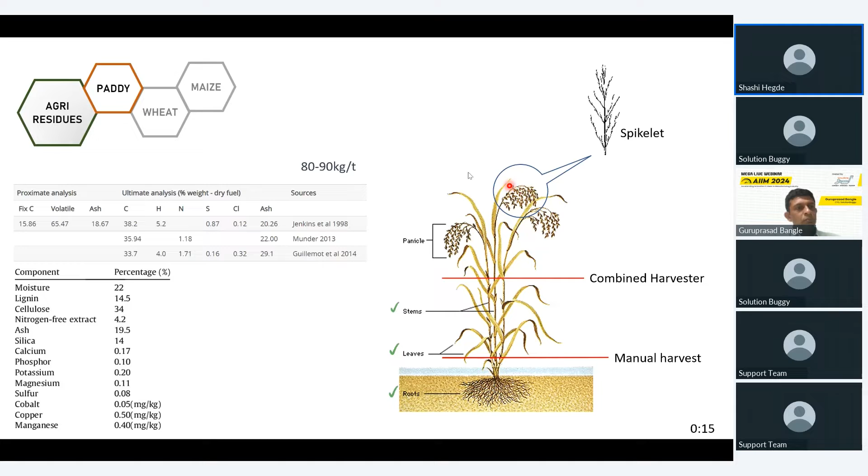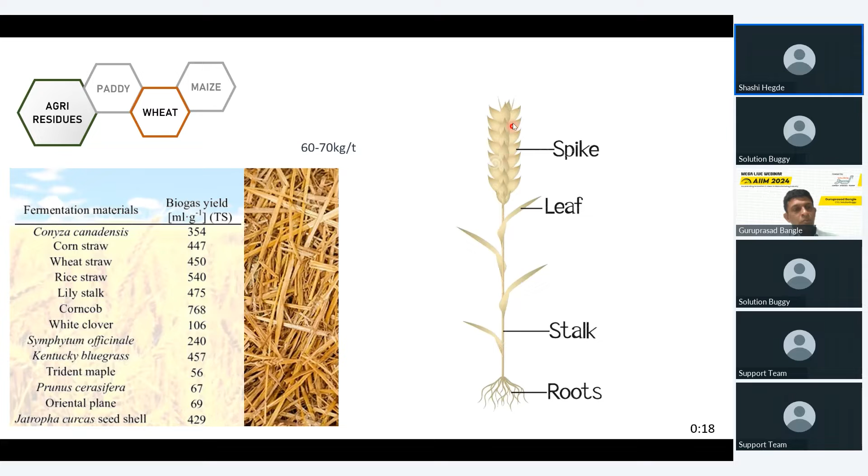Then coming to the wheat straw, that is also of the same story. Whatever spike is there, that is not digestible that easily. Better to make a pellet out of it.

Then coming to maize, there are two options. One is the maize silage, and there is the cobs. Option 3 is harvesting it halfway through, when just milk gets formed in the corn kernels, and digesting it at that time. Then you will not get the corn at all. You will be using this as an entire energy crop, just like Europeans.

The same thing we slightly modified, and we started using Napier grass instead of corn. The advantage is with Napier grass you need not keep sowing every year or every season. Once you sow it, 8 to 9 years you can keep on harvesting. Whereas with maize, if you use it as an energy crop, every time we will have to redo the things.

Then coming to Pressmud, Pressmud is more meaningful for people who have a sugar factory. For rest of the people, sugar factories are generally controlled by politicians, so you should know how to handle them. They may or may not respect the agreements. They may not go for long-term agreements. So just believing in a single sugar factory, if you go for a Pressmud-based CBG, it may become risky. That is the practical aspect of it, not the scientific aspect.

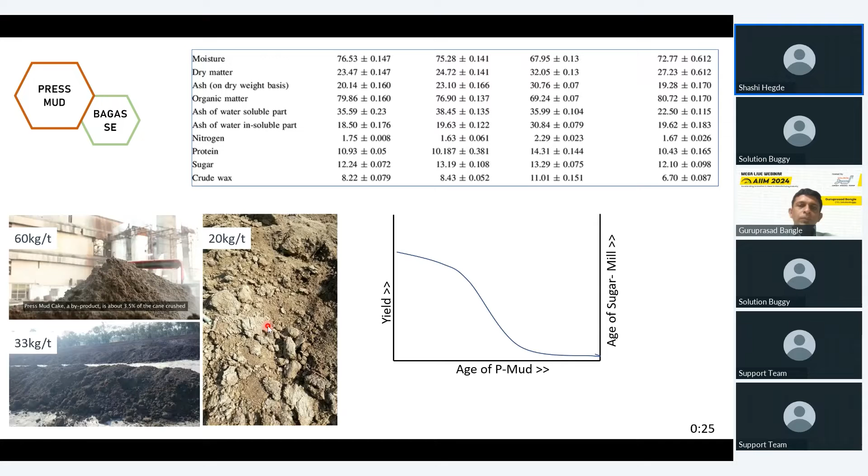Then there is rule number 3. Rule number 3 is: younger the plant, easier to digest. So if we take paddy straw, if paddy's life cycle is, let us say, 4 months, and you cut it at 2 months, you can digest the entire paddy plant.

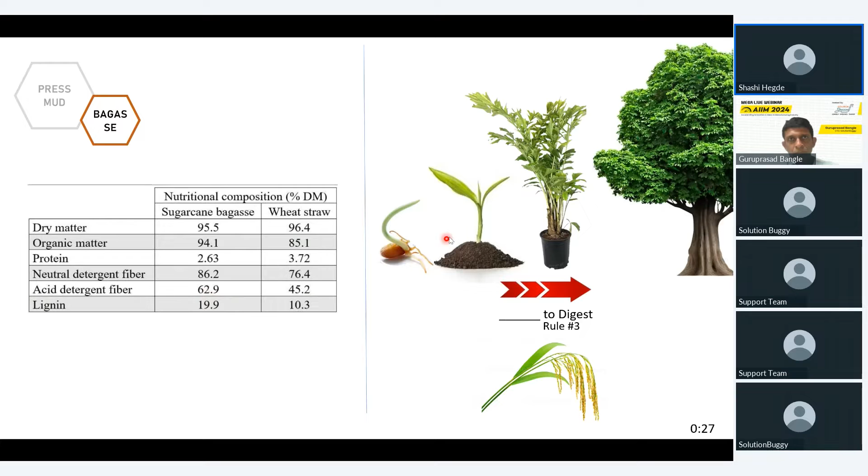Whereas paddy is giving the rice also. When it gives the rice output, the plant has finished its growth cycle. When the plant finishes its growth cycle, the lignin component, which is non-digestible or difficult to digest, is highest. So the older the plant, the more difficult to digest. That is the thing we have to keep in mind.

And the good thing about all animal manure, especially cow dung and things like that, is that the bacteria as well as the food are side by side. It is already there in the cow dung. So this will never get into any failure, because bacteria and food, everything is there. So it straight away goes for digestion. So for 25 to 30 years, there are millions of plants established based on the Deenbandhu scheme which are still running, because it is easiest to digest.

But we have a very low yield. It will be 15 kg per ton to 22 kg per ton. So we have to see that, in the Indian context, it is not highly profitable from cow dung.

The reason is that large dairy farms in Europe and US have a mechanized way to collect the cow dung and all the waste they generate. Typically, there will be a moving belt which keeps scraping the surface. Whatever cow dung is there comes out and goes into a channel or equipment. It gets collected and flows into the digester. There is no manual intervention required.

Whereas Indian cow herding or keeping of cows happens typically either in a dairy where it is managed manually, or in a Goshala where it is a totally open space. So each lump of cow dung may be falling 10 meters apart, and it is very difficult to collect those kinds of things. So we have to keep those in mind.

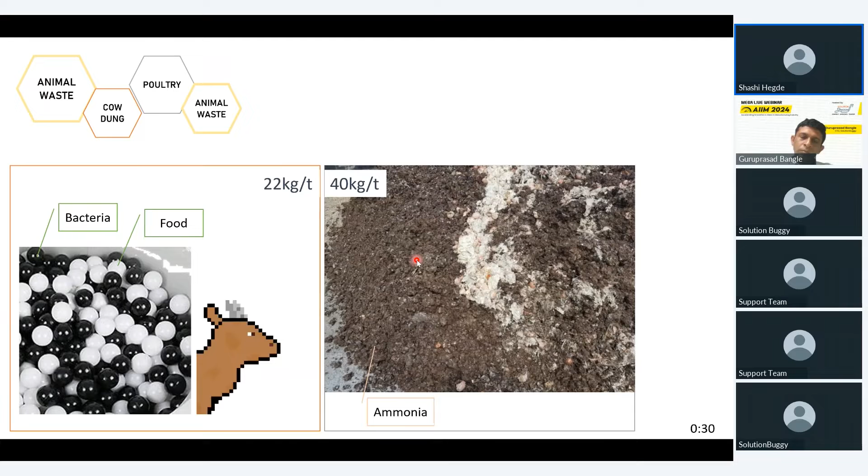Two things will come. One is sand, which has to be filtered out, and this has a lot of ammonia. So you have to keep mixing in external air, and whatever nitrogen content is there will fly away. Otherwise it will become overfeeding of nitrogen. Only then can it be fed inside.

But your project will be giving out a horrible smell. So that is how the poultry litter works. You cannot put it very near urban dwellings or areas where people are living, they may complain. Poultry litter will horribly smell because of the ammonia.

All this gas generation, whatever people say, is not at all new. Every ETP, STP plant is producing methane. In most cases they are collecting it; in some places it is left to air.

But here the concentration on our problem statement is to clean up the water, so people are not caring about emission of the CH4. There are many ETP, STP plants - effluent treatment and sewage treatment plants - which have a digester called UASB. So they are producing biogas, and in some places they are just burning it off.

Here the advantage is raw material is typically free in an MSW plant, and if possible, negotiate with the local municipality to give a tipping fee on top of the raw material, some 100-200 rupees per ton. If they give that, the whole economics will work very well.

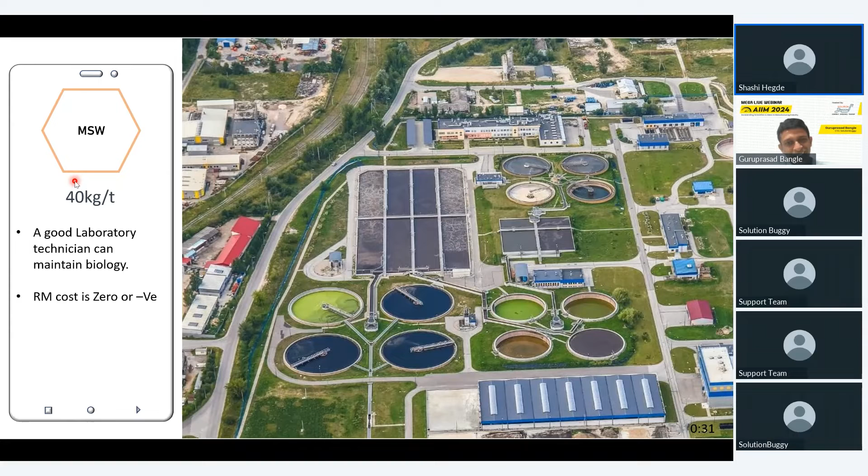Considering all those things, around 60% will be biodigestible. Another 40% we will have to send back to landfill. So that's why tipping fee is very important in MSW projects.

Then coming to our own favorite, which is the Napier grass. Here we need not depend on anybody - depend in the sense, depend on the farmers. We can take land on lease or contract farming basis. It's extremely easy to grow, just like sugarcane, and it will keep growing for 8-9 years.

What we do is, there is ready sugar and protein in this, which we will anyway digest. Any bacteria can eat away this protein, oil and sugar. Nobody can stop this gas generation either, so this will automatically happen.

So 35 kg of CBG will come because of this. Then we are left with the fibrous part. The fibrous part is also digested using an enzyme, so we convert it to cellulose, hemicellulose, and then to sugar. Once it becomes sugar, the bacteria will take care of making the gas. That way we are generating 65 kg of methane from 1 ton of Napier grass.

And all our projects are basically viable without considering any revenue from the fertilizer. The fertilizer, you can either sell it or put it back into the Napier grass.

And this pre-treatment - there is one more major difference we have to highlight. With pressmud, cow dung, poultry, the size reduction has already happened, it's already in a very small size. You just have to add water so that it becomes slurry.

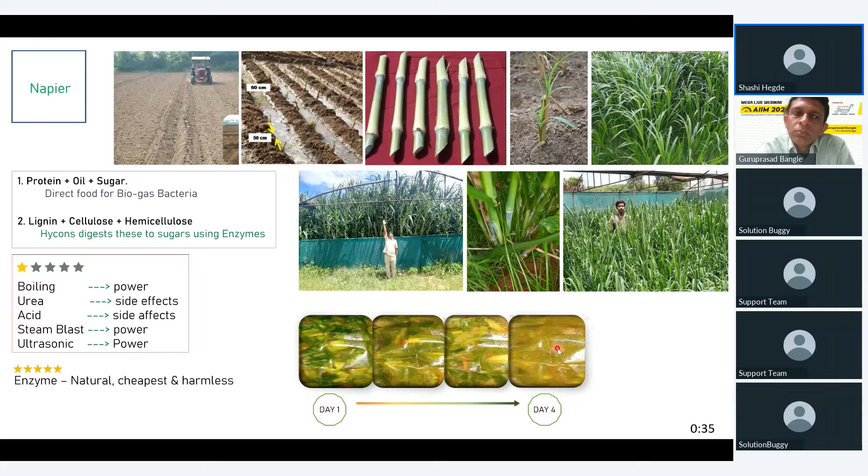When we do the enzyme-based process, you can see that on the first day it is all chopped grass. By the fourth day, it becomes a liquid or sugary slurry. You are pumping, mixing within the digester, moving the slurry here to there, everything will become very easy, just like water. So this was our experimental plant, and here I would say how we got so much data.

There are only two companies that did R&D in India when Satat came in. One is Hycons, ourselves. The other is Praj. Praj Industries were connected with the sugar industry, so they did a lot of research on Pressmud. Whereas Hycons, being from Bangalore, we did not have access to any other raw material, and we did not want to go to municipal solid waste.

So we came out with, we started studying and finally arrived at Napier. But Napier had no technology available, so we had to develop the technology. You can see square, rectangle, round, all kinds of digesters we built on a rented place. Then for all this purification, we converted our truck, which ran for about 10,000 kilometers. Then we also built the purification unit just to understand how it works, so that we could ask the right questions.

to purification suppliers. Then even a central government minister visited during our R&D days, because the government wants to go for multiple cropping or crop diversification. So that's how we got approved by Satat, Indian Federation of Green Energy, Agarkar Research Institute, Indian Institute of Science, and last month we got approved by the Ministry of Renewable Energy, Kapurthala Institute also.

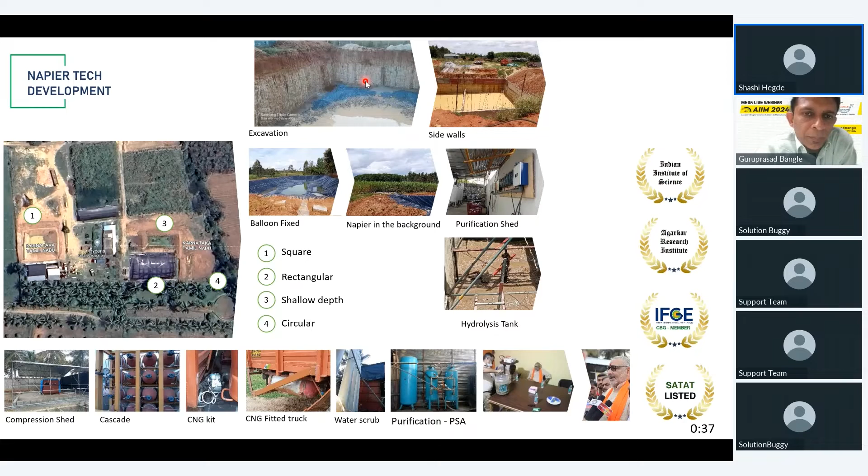Then coming to one important thing all of us have to learn, especially the technical guys. There is a gentleman called Buswell. He was American, working in something like the Pollution Control Board in the US. In the municipal solid waste side, he wanted to understand mathematically how much gas will come. So he came up with a formula to estimate methane yield from a feedstock.

If you do a Google search, you will get this formula. We will not get into the nitty-gritty of the formula, but just remember the Buswell formula. You can really estimate the entire gas potential from any feedstock.

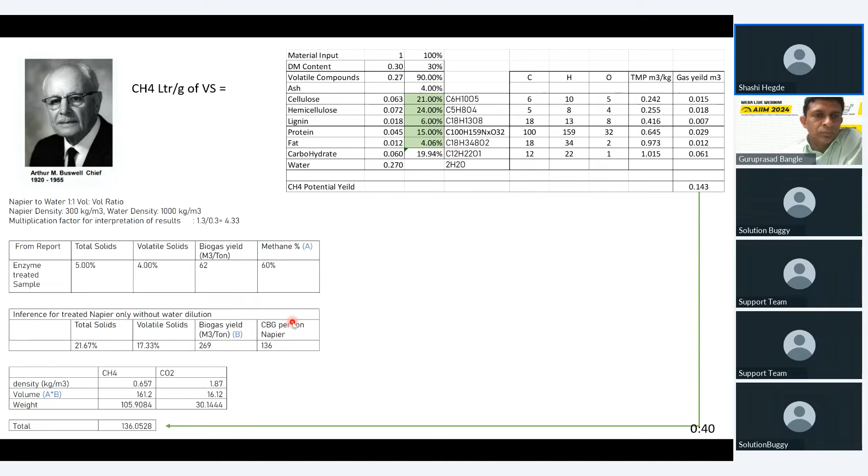Now if you look at this, this is the Napier calculation. It is supposed to give 136 kg of CBG from 1 ton of Napier grass. That is, 13.6% is supposed to come, whereas we are halfway through, because there will be efficiency losses due to the large size of the digester.

Then the next point we have to cover is whether we can mix multiple feedstocks. The true multiple feedstock is nothing but municipal solid waste. So you get to hear multi-feed digester, multi-feed digester. There is no way multi-feed digesters and all will just happen. Let me give you an example.

I am a South Indian. My diet is fixed for a rice-based diet. Probably once in a while I can eat roti. Similarly, my North Indian friend's stomach is adjusted to wheat. The same way, when we shift, if I go to North India and they come to South India, and we continuously start having that food, even within our digester, which is the stomach, there will not be a conducive environment for those bacteria.

So we will end up having acidity. If somebody is promising or thinking of putting anything and everything into the digester, it is possible, but not like a drastic difference, not the very next day. There will be a gradual increase you have to do, then a gradual decrease you have to do, so that the bacteria eating that particular substrate get developed and multiplied. So suddenly we cannot give a shock to this bacteria.

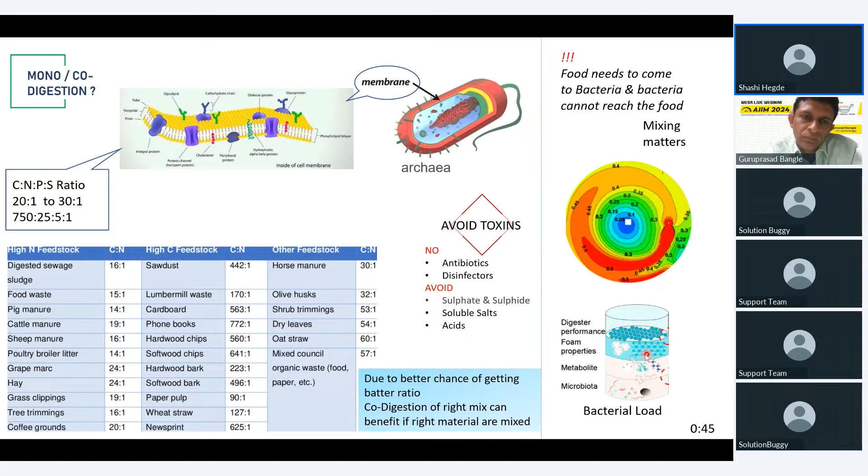Right, this is the basics about feedstock, and don't ignore the mixing. These bacteria cannot move around on their own. They cannot swim. They do not have legs, hands, and limbs. We have to see that the food reaches their mouth. So the only way is to mix the tank very well, and at various levels different types of bacteria are there. Mixing doesn't mean making a lassi. So we have to take care of it. So this is about the feedstock.

What we'll do, people will go to sleep. So we'll take a round of session questions.

So one question which came up is a continuation of what you were discussing. You said we can use multiple feedstock, but if you are going for Napier or anything, you should do the pre-processing before, right? So how many days more does it take? Let us say the number of days it takes for the bacteria to digest and release the gas. Will that increase when you go for Napier, because you will have some days for it to get pre-processed?

No. And see, on average, we have to maintain 30:1. There is no increase or decrease in that sense. Now let us say cow dung will get digested in 18 days. Napier and all, better to keep it for 40 days. But at the same time, from 1 ton of cow dung you are getting 15 kg of CBG. From Napier you are getting 65 kg of CBG.

Right. So if more sugar or carbohydrate is there, it takes more time for these bacteria to eat and make it 80-20 ratio. We call that HRT, hydraulic retention time. Thumb rule is all pre-digested, like cow dung, poultry and all, 20-22 days. Pressmud is like 25 days. Then any agri biomass, better to keep it for 40.

So now we'll talk more on economics; the feedstock part is done. We'll talk about producing the gas. Since I have spoken on most of this Napier part, I will skip this. And we also talked that this gas production is natural. We can either capture it or leave it. In nature, the ultimate reality of any biomass getting degraded is becoming a gas. Even the human body, when we bury it in soil, will finally become gas only.

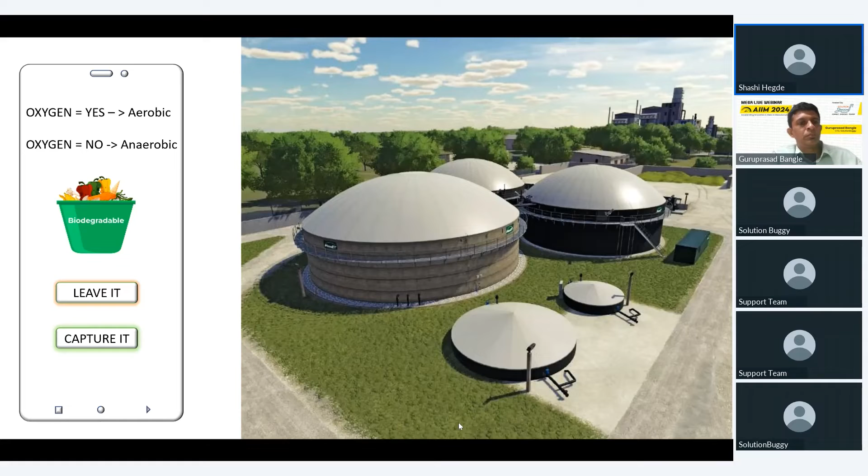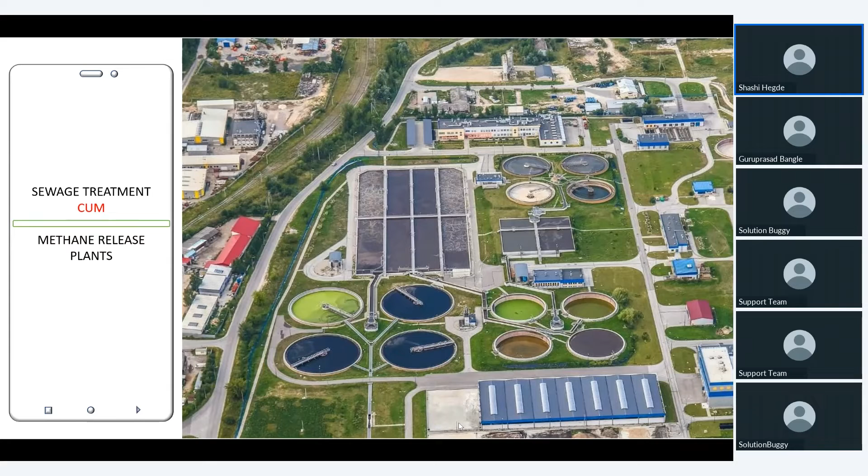This sewage treatment plant we have already discussed. They are releasing the methane or they are collecting it. There are probably lakhs of plants based on sewage water. So CBG, biogas generation, is nothing new for the industry. Only this SATAT initiative is new. And this is very important for all the people who are interested in doing Google-based research. In Asia, typically we call it CBG, compressed biogas. In Europe, they call it biomethane.

And about Napier, there is not much Napier in Europe, because in that region what really grows is something called switchgrass. There are some people saying Napier-based plants are in Ukraine, UK and Austria. There are some plants, but the major thing is switchgrass. Germany does not have any Napier grass based plant, so you can go and search it. Then next is South America. They call it bio-CNG. In the US region, they call it RNG, renewable natural gas.

There is one more process which produces methane, which we call syngas, synthetic gas. This is not coming from a biological process, but by heating the biomass to 800 plus degrees Celsius. Then methane will get produced. That is called pyrolysis, incinerator, whatever name we call it.

The basic process has 5 steps. One is we have a biodegradable raw material, the various feedstocks we have already talked about. That gets into a covered digester. It can be metal, concrete, FRP, rubber, whatever. Then we are producing raw biogas. Raw biogas has hydrogen sulfide, carbon dioxide, water vapor, floating particles, silicon particles, and methane. Our required gas is methane plus some allowed amount of carbon dioxide, which is 4%.

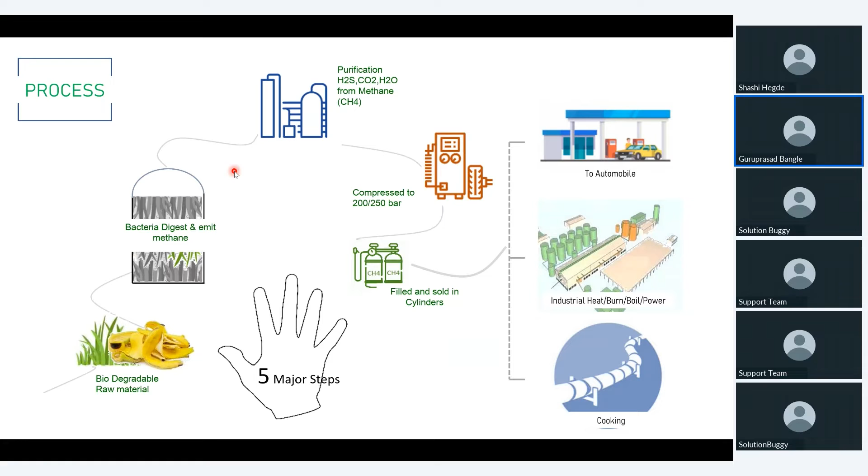When there is a market, then only the sales can happen. This we have discussed. This all we have discussed. Now I am coming to the digester part. So what are all the types of digester there?

Many people say proudly, dry digestion. There is nothing called dry digestion at all. Any biodigestion needs water. No cow can be fed paddy straw without water. So it has to drink water also. Right. So dry digestion means there is 15% plus solid.

85% water is still there. When 15% plus solid is there, we call it dry digestion. When 15% and less solid is there, it is called wet digestion. So dry means it is not like creating gas out of a powder. Water mixing is there. Then on a construction material basis also we can classify.

There is concrete. It can be 20-25 years also, you can easily target the life. Steel, typically people say 10 years. Then there is flexible sheets. These are all for no immediate purpose or low cost purpose, or just biogas to electricity kind of purpose. So flexible sheet is the HDPE sheet, and many types of materials will come.

Next is the FRP. FRP is a good one, but the problem is it's not environmentally friendly, because once you discard it, probably for millions of years it is going to be there telling our story of the biogas plant. Secondly, if there is a crack, and that will happen, if you drop a hammer, it will generate a crack and hole. There is no way to effectively plug that damage in the FRP. It is like a one-time build kind of thing.

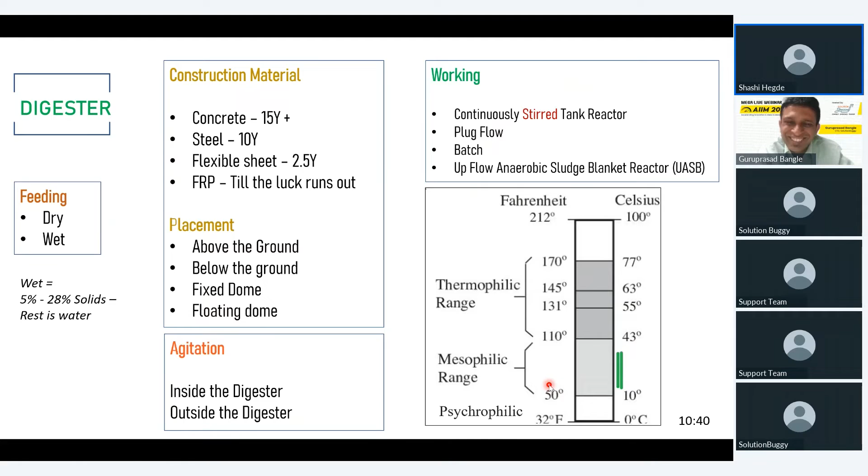That is the thing. Now, we are all fancy jargon kind of people. So you will come across people who are telling hydrolysis, acidogenesis, all big words. So let us try to simplify and understand these big words. Hydrolysis is: suppose we mix wheat atta and water, forget to make chapati and leave it for 2 days. Some amount of watery kind of thing will start. So hydrolysis is nothing but that.

There the water is getting generated and all these long chain polymers are slowly getting degraded to simple edible components for the bacteria. Next, this will become sour. Sour in the sense we cannot compare it to our curd becoming sour, but we can compare to the same chapati atta becoming sour after 2 days. If we chew, it will have a sour taste. What has happened is it has become various acids. Acid is typically sour. Here lactic acid predominantly will form. That's why it shows the sour taste.

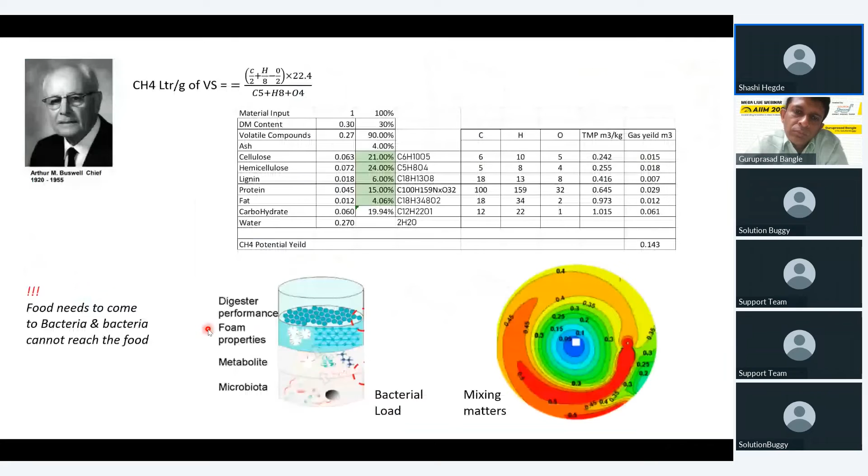And when purification companies talk about the preparation of the gas, they are talking about removing the H2S, moisture, and the particles. Once that is done, next we have to separate the methane as well as the carbon dioxide. So CH4, CO2 are getting produced. We have to separate those two things out. Just like in a hospital oxygen generator, nitrogen and oxygen are getting separated. In a similar way, we have to split this.

The methodologies are not very many. One is water scrubbing, just like soda contains CO2. In a similar way, methane or biogas is brought in contact with water. Then water will absorb the carbon dioxide. It will not absorb the methane. So water becomes soda, and in the next stage it will bubble down and release the carbon dioxide. It will come back to this tower. So this is water scrubbing. This can happen with pressure, without pressure, at atmospheric pressure, at low temperature, high temperature. So many things can happen.

Next is the exact same thing. Instead of water, we are using a chemical like amine. So amine or sodium hydroxide, when you use those, where water can absorb, let us say, 2%, this will start absorbing 20%. So that is the advantage. And here also, once this is absorbed, it has to be regenerated. If this is happening at room temperature, the carbon dioxide has dissolved in the chemical. It has to go to the next stage, and there we have to boil it to bring out the carbon dioxide and keep on recirculating. So operational expenditure will be high because every time we have to cool this liquid down and boil it again.

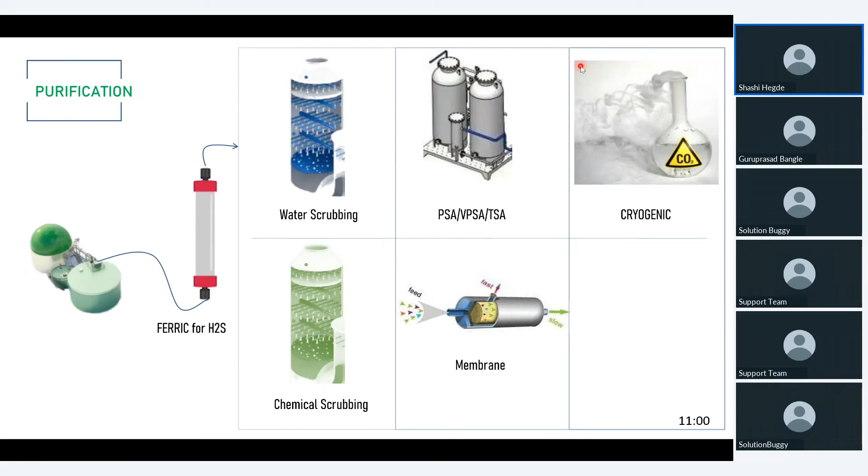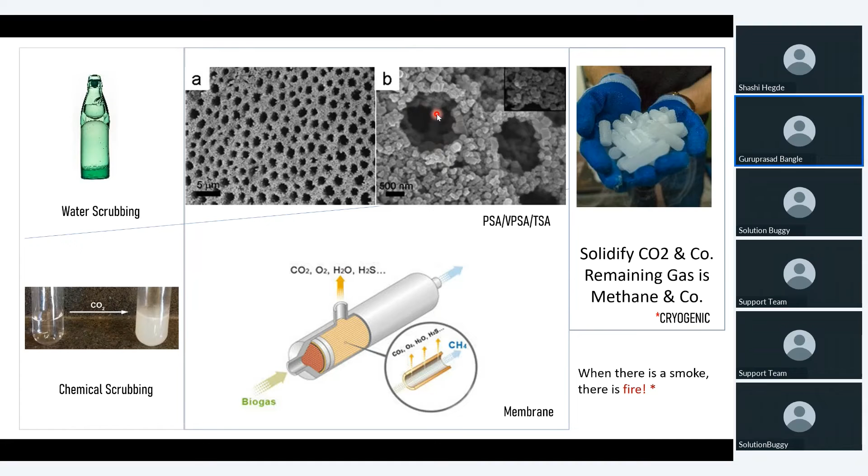Cost-wise, probably the lowest cost is the general atmosphere-based water scrubbing, but here, based on temperature variance, your purity will keep going up and down. Next comes chemical scrubbing as well as pressurized water scrubbing. These are always in cost-wise competition. Then next we have PSA and VPSA kind of technology, then membrane, then cryogenic. So this is the cost-wise comparison.

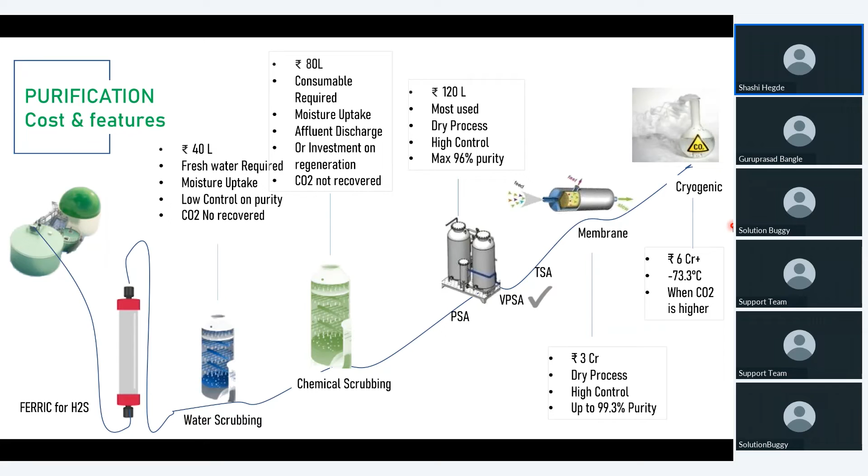Then coming to compression, we have 2 technologies available. One is the compression which is happening probably in our puncture shops, in our car tire, what we are filling. That is a mechanical compressor, and a reciprocating piston will be there that keeps compressing the gas. It uses quite a lot of energy because there is a lot of heat loss due to the reciprocating movement.

The second type is like a bulldozer, where hydraulic oil is pressurized and that is moving the piston. So whenever there is piston movement, it transfers the energy to the gas, but whatever is left over comes back to the oil. Whereas in reciprocating, if there is gas or no gas, the moment a stroke happens it goes forward and comes reverse, one cycle complete. Again, to go forward it needs full energy. Whereas here there is lesser loss of energy in hydraulic.

But there are some constraints in hydraulic. It cannot take from atmosphere bar; we have to raise it to some 40, 50 bar pressure, then only it can take it further. But the power consumption is very low. Combination of these two, when we do, then we have the advantage of lower OPEX. And because it is all oil moving kind of thing, the wear and tear is low. All our HPCL, BPCL, IOCL, whatever CNG outlets you are seeing, mostly the booster compressor is hydraulic. Very few cases there will be mechanical.

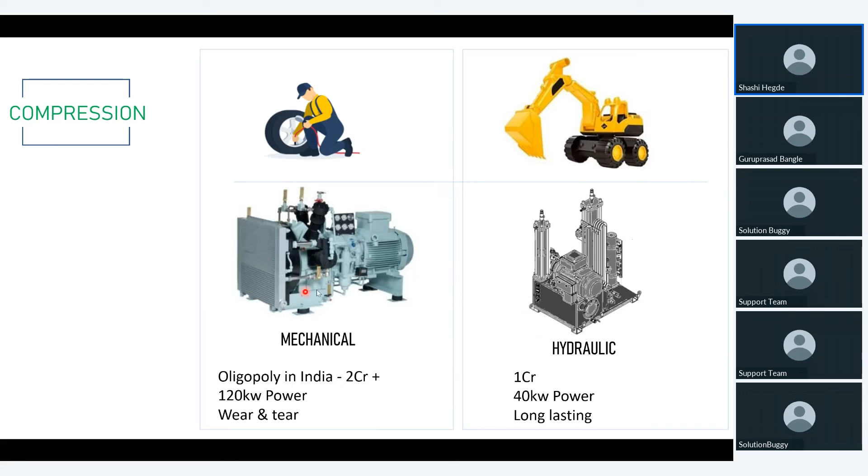Then coming to distribution, it cannot be distributed in household kind of cylinders. Household cylinder working pressure is 2 bar, it is built for about 13 bar. The moment it crosses 13 bar, you can expect a what is that, Rameshwaram cafe kind of incident.

Also we can make bio LNG, that is by reducing the temperature. This is for hotel supplies. You can also make 1 number, 4 number cascades. Many people have a misconception that cascade means 40 cylinders. There is nothing like that. You can make even a 100 cylinder cascade or a 2 cylinder cascade.

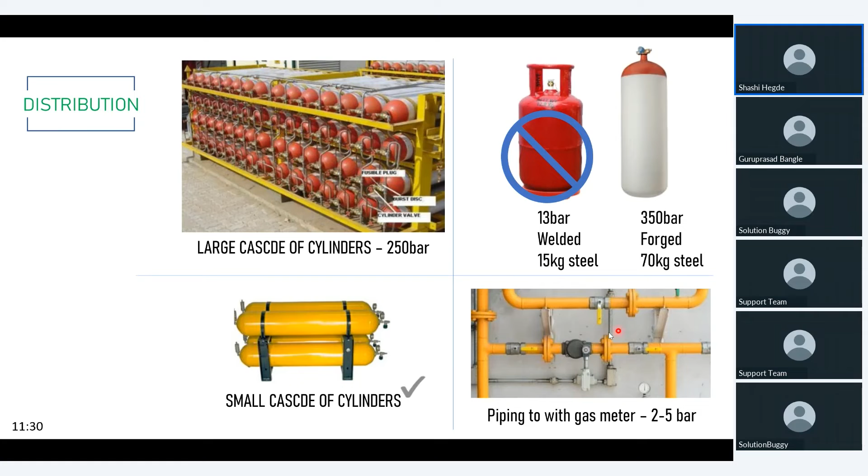Then next is the pipeline. This is how the distribution happens.

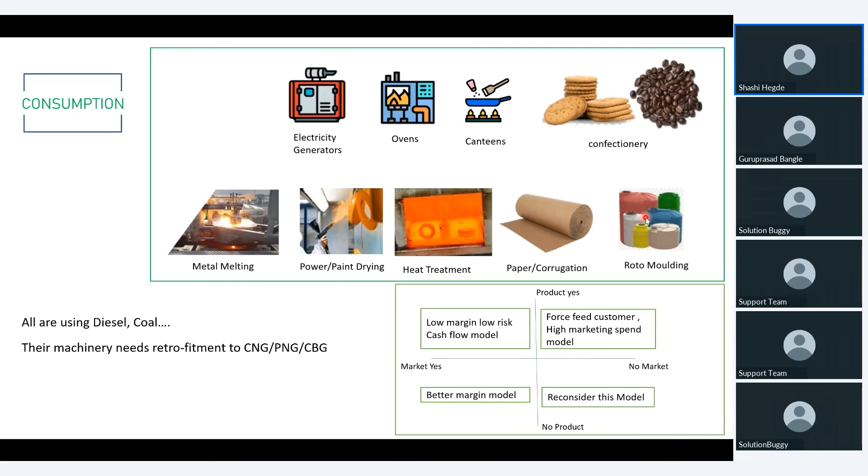Also, existing burners and engines can be converted to CBG or CNG, or it can also do dual fuel, meaning it will run either on diesel or on CBG. So that also is possible. So there are unlimited opportunities in sales.

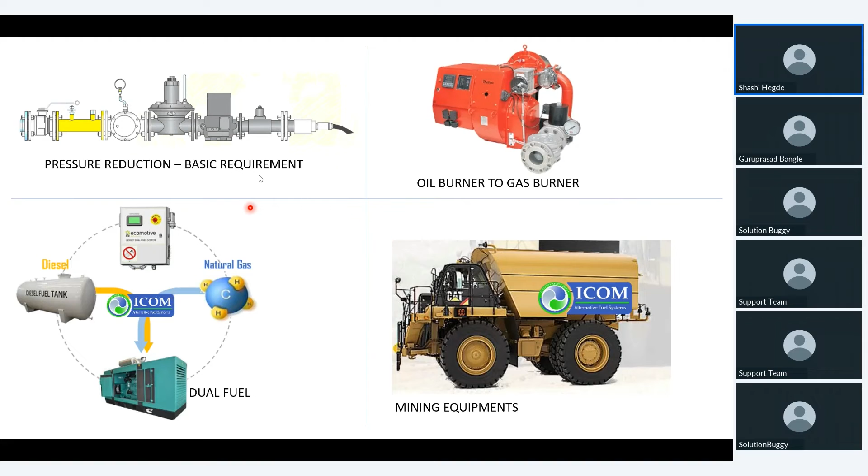Before all this, I was with a very large EPC company, L&T. So what we learned during those days is...

For CBG or any large project, first you have to think of investment justification. Why at all am I getting into this? To make more money, increase wealth, or reduce the cost of energy within a factory. So there can be multiple reasons for investment justification.

Once that is done, you have to go for a comprehensive RFQ. If you just say a 3 TPD plant I want to set up, it becomes very easy for external people or consultants to misguide you.

So as far as possible, derive the proper problem statement. Or you can always hire a consultant, because whatever money you spend there will ultimately save you in lakhs here. Just a few thousands you may be spending there.

Then once that is done, you have SolutionBuggy and many options available. You scrutinize the replies based on technical and commercial capability, and select a supplier or technology provider.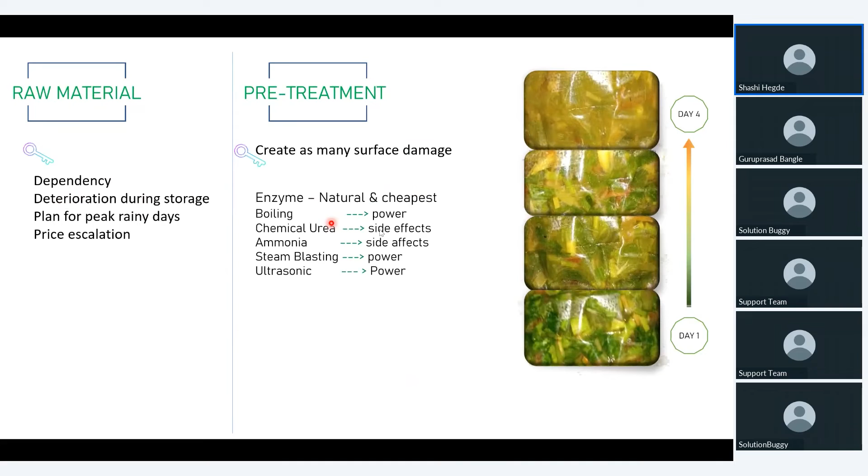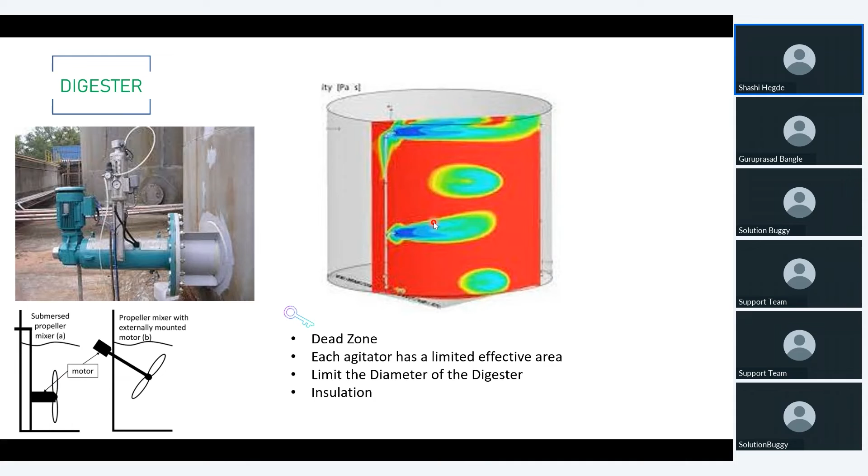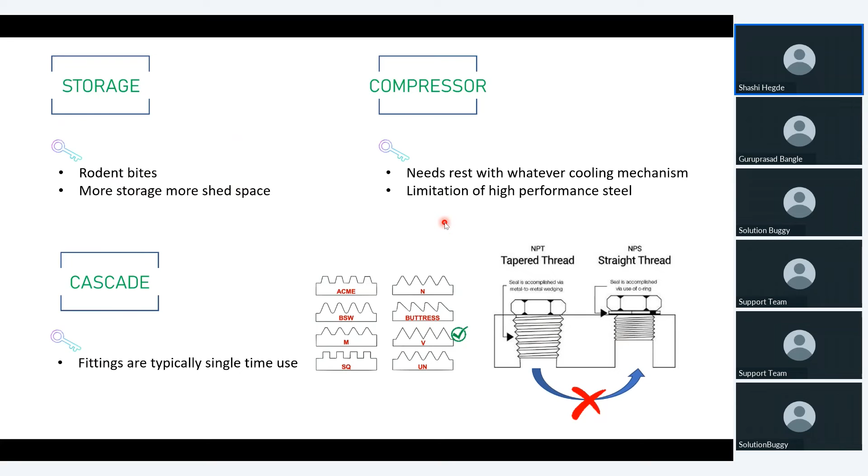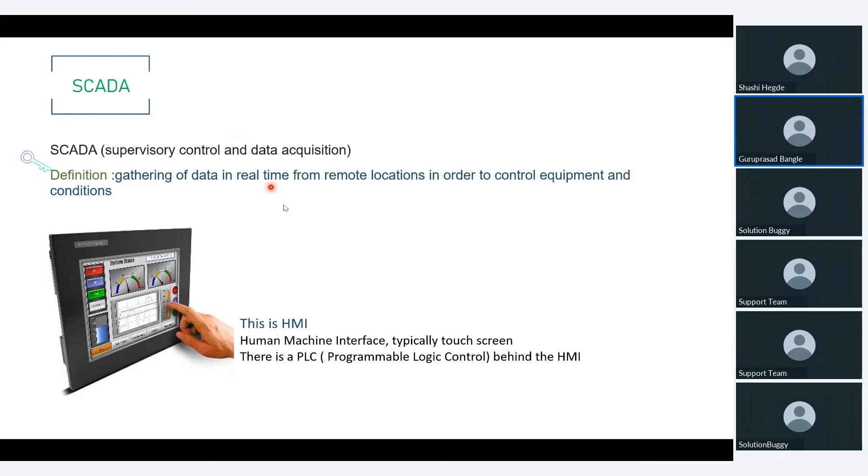Sir, to the question, I think probably Guruji Guruprasad has highlighted the part. Right, so take a question for getting into it. I will just - you give an idea of the investment and then I can ask the question, right? Right, sir. I have made a very simple sheet instead of getting into too much of the nitty-gritties of projected financial depreciation, that thing.

What we'll do is take an example of like 3 tons - the typical cost of plant and machinery. Generally, as a thumb rule as of now, you take it as 5 crore per 1 ton output. So based on that, some 15 crore will be our capital, and in this there will be some amount which is GST, which will be coming back to you. So all those things - but as of today, there will be an outflow for plant and machinery. For this, 30% is the expectation of the bank for the margin money. Then capital loan of about 10.5 crore we will be taking. Then working capital you need. Then there is a subsidy component which is 83 lakh rupees per ton of output - so whatever size you build, 83 lakh applies. Now I have a sample for grass.

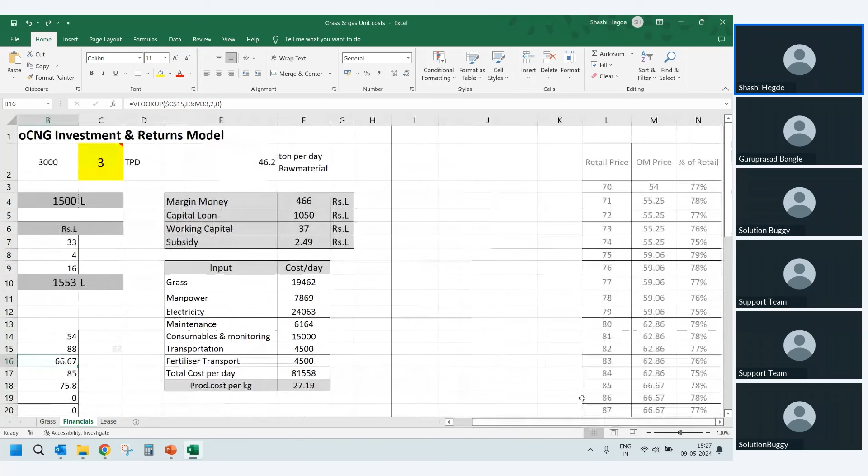Right now in the outside market, typically all across India, the sales price is 88. So CBG producer will get 66 rupees 67 paisa plus GST, that is what they will get. When it becomes 89 also, it will remain the same. When it becomes 90, this will jump up by 4. So every 5 rupee jump, you can see there will be a 4 rupee jump in the buying price. So that is how it is. Around 78% of the retail price will be the OMC's buying price, you can say.

External sales I am saying at 85. So now income from sales of gas is coming at this 66 rupees 67 paisa. We have 3000 kg every day, 365 days of running at 90% efficiency. So just by selling the gas we are having 6.5 crore of revenue. So 3 TPD, 6.5 crore, so 1 is to double, that is the way we can easily remember it.

Then fertilizer income, I am showing at 0 in this, but we'll add, there is 1500 per ton which is market development fund. They will be paying you for the first 3 years, so that is fetching about 30 lakh.

And if we properly brand it and promote it, it can go up to 7-8 rupees per kg also. This is the bare minimum I am taking. Liquid fertilizer, typically there will not be any market. So in Napier case, it goes back to the Napier field, or else you will have to give it free of cost to some people. There are companies who are able to brand it, but it took some 5 to 6 years for them to make their brand.